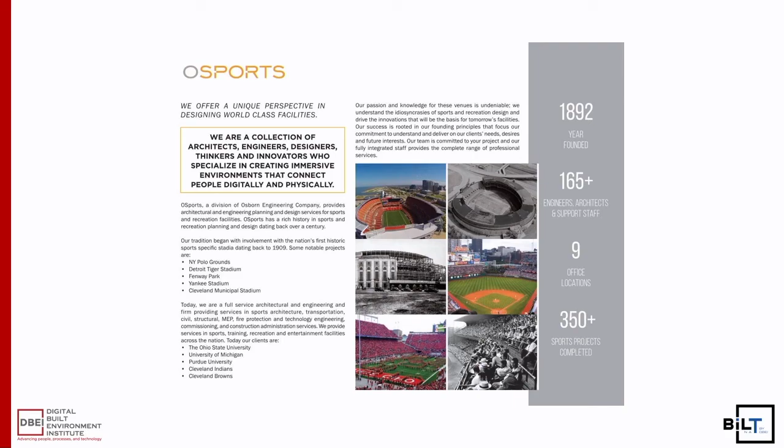So 100 plus years old, a lot of cool projects, a lot of cool opportunities, and that experience has been propelled by these 4 dynamic companies. I've had the esteemed pleasure of working for those companies for an enormous amount of time - over 18 years. They're tremendously creative people and forward thinkers. Everything you see here is due to these 4 entities, so I want to give them proper credit and respect, because it's become a really killer opportunity.

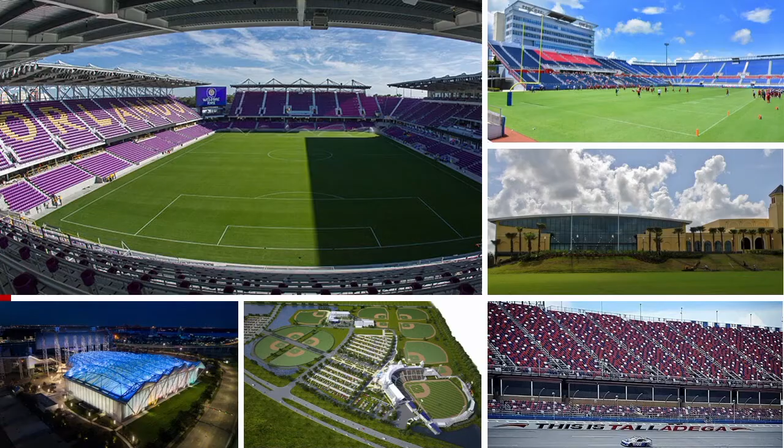An opportunity where I've done soccer stadiums for Orlando City Soccer, one of my hometown delights, the FAU football stadium in Boca Raton, the Jostens Center at Disney in the right corner. Even more utilitarian type projects like NASCAR at Talladega, spring training complexes, dormitories and resident buildings for players. The one in the bottom left is really amazing - that's the Jacksonville Jaguars amphitheater and covered flex field in Jacksonville, Florida, which we're going to highlight, because that's where this whole thing started for me.

Before I get into that, the learning objectives - even though the title says faster stadiums using Modular, that's just the tagline that sets up the story. What we're talking about is the new process-oriented delivery. We're talking about how we can leverage our construction managers, our engineers, technology and architects systematically, so it makes our life and our projects better. We're talking about a new way to project deliver projects. We're talking about modeling, how we model, and how I think there's some efficiencies and waste in modeling.

We're going to talk about why I think team is universal. I don't think team should ever again be - and I don't think in 3 years a team will be - architect, engineer, contractor, and supplier. I truly think that's ridiculous. The discover options is a particular option - I'm going to show you a case model of 1904 FC, a soccer stadium concept in San Diego for an emerging market. So we're going to highlight that.

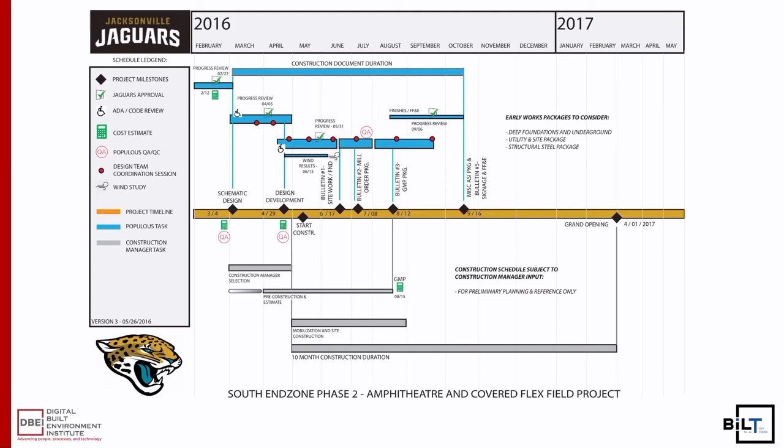So for us to get to the flow, we had to identify what software we were using, how we were going to use it, who's going to use it, and who's going to model what. In this particular case, we used Revit and Rhino, we used Grasshopper, and then obviously Tekla. So don't worry about the words, but basically Populous designed the model with Rhino as the geometry.

We used Dynamo and Grasshopper to transport that into Revit to use native geometries. Then the Grasshopper script would communicate back and forth with Walter P. Moore's model and with Banker Steel for the Tekla model. So we were able to use one model, one script to help navigate that, which was really effective, because ultimately we were able to control the steel model. We owned the steel model. It was one source, one whole.

So we used some other things like Kangaroo and everything to help with some modulation, because we had to do ponding. The fabric was on the bottom of the steel, which obviously has waterproofing issues with that. But quintessentially it's the Revit, the Grasshopper, and Rhino.

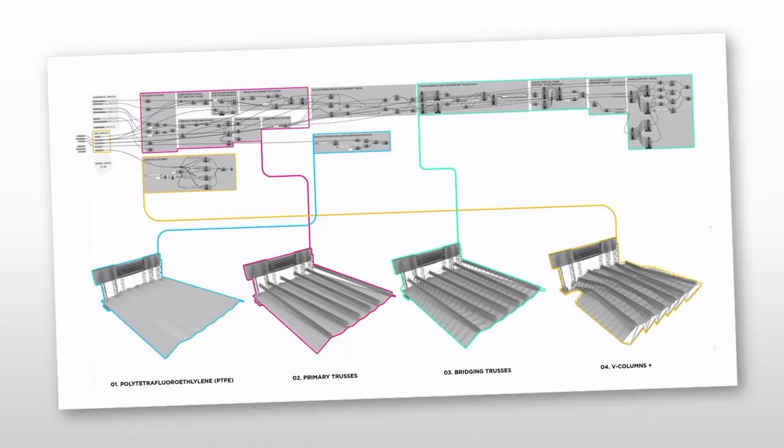So this diagram is really awesome because, although I didn't have anything to do with authoring the Grasshopper script, we all talk about BIM plans being a thing back then - everyone should have a BIM plan. But for us, we did have a BIM plan. Furthermore, what we had was a detailed delineation of how the Grasshopper script worked. It wasn't one person in the corner writing the Grasshopper script - we all knew where and how it was made, so at any given point it was understood what the process was.

We delineated what the PTFE roof is, the fabric, the primary, the bridging, and the V columns, because these are all things we were having conversations about with Banker Steel to save money and time. The V columns are these really accentuated columns on the south facade, and we wanted all this independent. So it was really important that we consolidated that effort so we all understood it, because it's another way the team is more collaborative.

It wasn't like I'm just relying on Andrew to do one thing and Tom to do the other thing - we all got it, we all bought into it, it was described. So what that allowed us to do was work from left to right. The problem was the building - that was the issue.

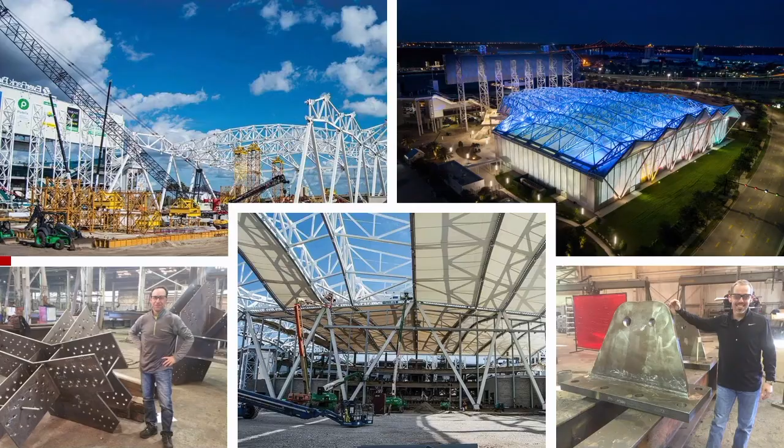So the key is, how do you clean that up, how do you avoid that potential chaos? Because that could have gone wrong real fast, that could have got bad. And it wasn't fun - I literally had an ulcer one time and had to go to the hospital. It was pretty chaotic, and it was chaotic because that was it, right?

In the bottom left corner is our esteemed structural engineer, Walter P. Moore, sitting next to one of these grids. I'm on the bottom right, looking at one of the V-column brackets. But it was us immersed in the process - it was Banker Steel, Walter P. Moore, Populous, ME Engineers, and Arup. We were all immersed in the process, taking accountability and ownership.

And I think that even though this is an enormous project and it kind of blurred the line, there's a lot to be taken from this and how we can better effectively implement projects moving forward. We're going to get into that later. But you can see the steel, it was ridiculous.

The building was 90% steel and fabric. Everything else was like concrete, essentially. But it was intense, and ultimately we had 24 columns.

Each one of these panels of fabric were all prefabricated and brought to site and dropped into place. We were able to take each panel, which was 24 feet wide from primary to primary, and we went 52 feet.

So it was a product of shipping. Fortunately, Jacksonville is on the St. Johns River, so there were conversations to be had about shipping and all that stuff.

It was really simple, right? We're talking steel and fabric, that was it. So we were able to take a step back and say, okay, how do we do this untraditionally? How can we do this faster and safer?

At one point in the main amphitheater bowl, I counted 24 booms, like cherry pickers, navigating in this thing. It's like, how do you do that without getting somebody hurt in a confined space? We decided, well, we work from the outside in.

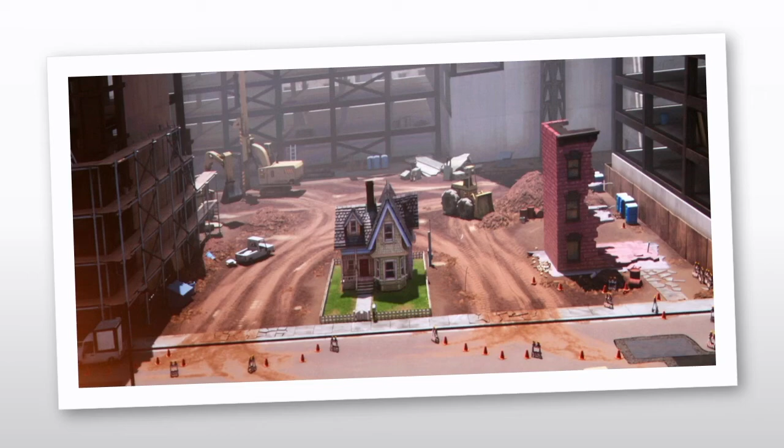So for me, I don't want to be that guy. I have a 2-year-old and a 4-year-old, and this is the scene from Up, the movie, where he's hanging on to his historical love of his house and everything he knows, and the world's changing around him. I look at that and think, holy shit, we live that.

It's the Seven Dwarf Mine Train. Has everyone been there? You have? Did you like it? Do you have kids? I do not have kids, but I am a child, and I love Disney. Yeah, I go all the time.

It's a really good roller coaster. So I got to do the whole theme park, the whole thing, right? Like all this, and there were some other companies that did Ariel's thing.

The moral of the story is we got to the point, and Seven Dwarf Mine Train was supposed to be Cinderella Chateau, where all this stuff happens, and then somebody at Disney literally raised their hand and said, well, you have Belle's Cottage, and you have Be Our Guest, and Gaston's Village, and the Little Mermaid, and Cinderella Chateau. What's my son gonna do? And we're all like, holy shit, he's right. So literally, the whole park was supposed to be done at the same time. So we found ourselves responding to the scenario, and Disney redesigned the whole thing, and they came up with Seven Dwarf Mine Train.

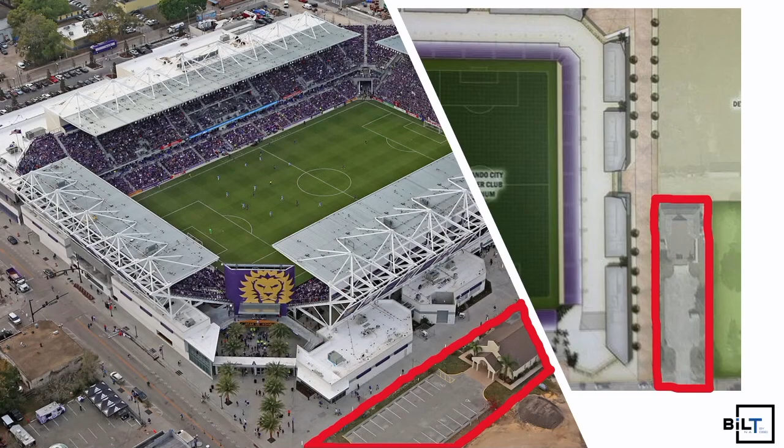It was really interesting because you go back to Mr. Fredricksen and Up, and you realize we see that all the time. Our project sites are getting tighter, the staging areas are farther away, the materials are different. So you have to be conscientious of how you're getting there.

So after Jacksonville and after Orlando City—actually Fantasyland came first, then Orlando City, then the Jacksonville Jaguars. I happen to love soccer, so I really, really like soccer. That's the project type I enjoy the most, and minor league baseball, just because they're more involved and more family friendly, I would argue. They're smaller, more boutique, more intimate.

So I know a lot of people in the soccer world, and I chase soccer projects. So around 2017, the 1904 FC, which is in San Diego—their logo, 1904, is literally 19 because S is the 19th letter in the alphabet and 4 is D. That's what they went with.

They came to me and said, well, we want a new building, but we don't know if we're going to have a good fan base. We don't want to spend $120 million and we don't want to build a 20,000 seat stadium as an emerging market trying to figure this out. Is there another option where we can build a football experience, a soccer experience, without investing a tremendous amount of money? So they asked that question, and we're thinking about it.

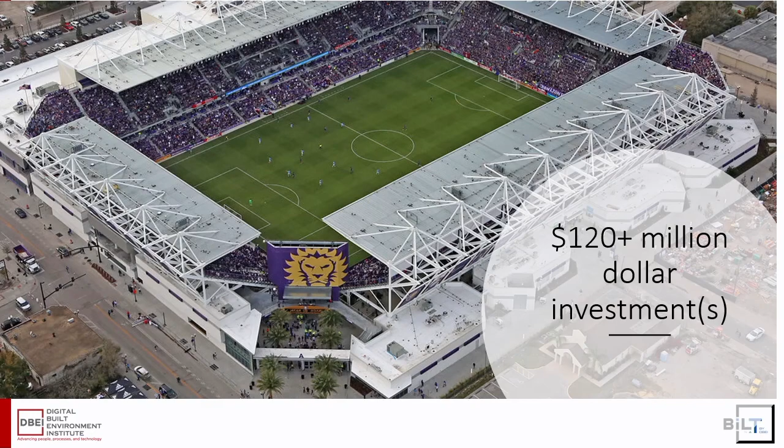So, again, it's like, how do we do a soccer stadium for $20 million or $25 million? So this was a design - we're going to get into this a little bit because that's the core at the end. But this is the design solution for a $20+ million soccer stadium in San Diego County for the 1904 FC, using offsite, prefabrication, and modular components.

Now, if anyone knows anything about any of those things, all three of those things are very different, right? Modular construction is just building something in a volume of a certain descriptive size. Prefabrication would be like building a head wall in a hospital, which is super complicated and challenging - probably, arguably, one of the hardest building types on the planet is a hospital. And then offsite construction is just physically that, right? So how do you converge all of that?

And it doesn't have to be a full mod - it doesn't have to be the cold, dense relationship of a shipping container, which is what traditionally people think of when they think of prefabricated or modular construction, which they have their purpose. We can look out the window on the other side of the building, and all the construction trailers are shipping containers modified. And there are some good examples - if you've been to a Starbucks, drove through the drive-thru, and saw two shipping containers welded together in the shape of a T, you had no idea because it had a great skin on them. So it's those kind of things that we have to take a step back and think more optimistically about how we can use sustainable objects. There are millions of shipping containers sitting on properties all over the place, just completely underutilized.

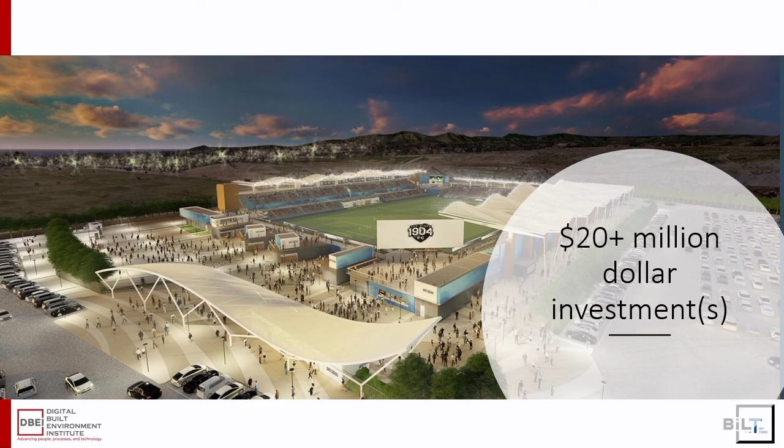So we come back to the $20 million deal, and we've all seen this thing. Viatechnik shared this graph, courtesy of McKinsey & Company, which is the firm my brother works for. The red line is the manufacturing world, and the gray line is construction. Every one of these charts shows manufacturing going up and construction staying dormant. The only way we're going to be sustainable in 20 years is if we figure out how to close that gap.

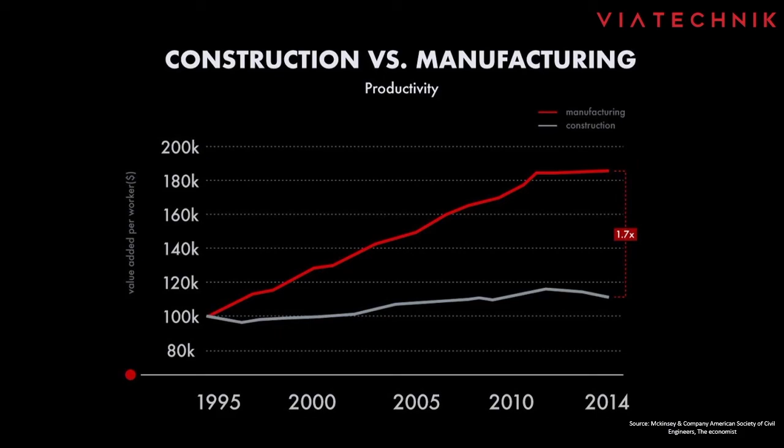Gross domestic product is going down, business sales are going down, jobs are going down in a traditional sense. But the economy and the opportunities are vast and growing. We're ignoring them because we're afraid of the risk associated with adopting them. We're afraid of performing appropriately, like the professionals we are, architects, engineers, contractors, and technologists.

So I mentioned digital practice. What is digital practice? Does anyone want to tell me what they think it is? Software used for production? I'd agree, implementing technology for... but I don't know. That's what I'm saying, what is it? Is it physically designing digital environments? Is it eliminating paper documents? What is the end goal, what is our product? Historically, we're architects building buildings and spaces, and contractors building buildings and spaces, but is that still it? Does it just change, is digital practice just the difference of not using sketch paper and bum wad and models? I don't know.

So these companies are trying to figure it out. We already talked about Disney. Does anyone know who PCL is? PCL Construction - they have a large headquarters, I think predominantly in Canada. They have a group called Agile, and Agile is a plant they sunk $2 million into, a fabrication arm within the company so they could do prefab and offsite construction.

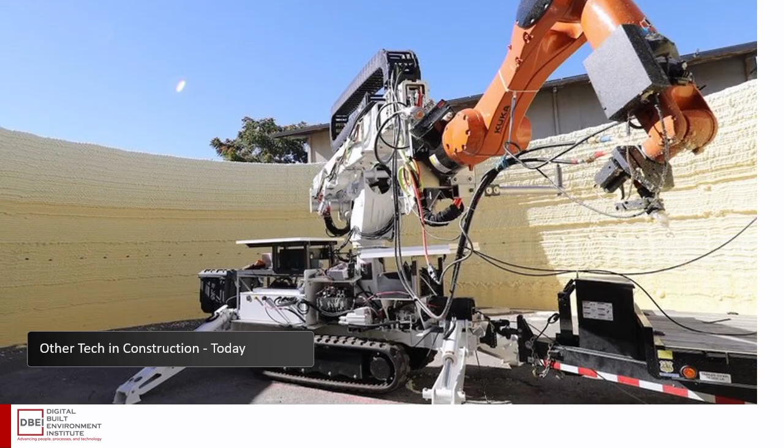So back to my brother's point about outsourcing — in 2013 he said everybody's going to be a robot, and he's right. We have robots building houses in China, we have robots from Boston doing backflips, we have robots building furniture.

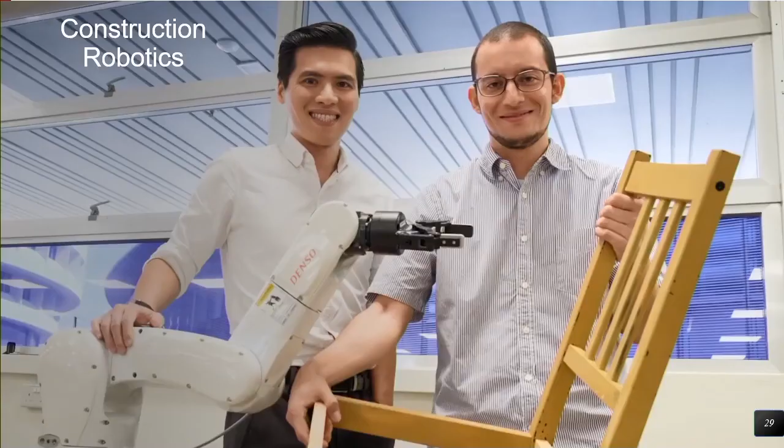Right? Super simple, but proof of concept. If we don't pay attention to these tools, we're just gonna keep going down a dark path. And 20 frustration-free minutes.

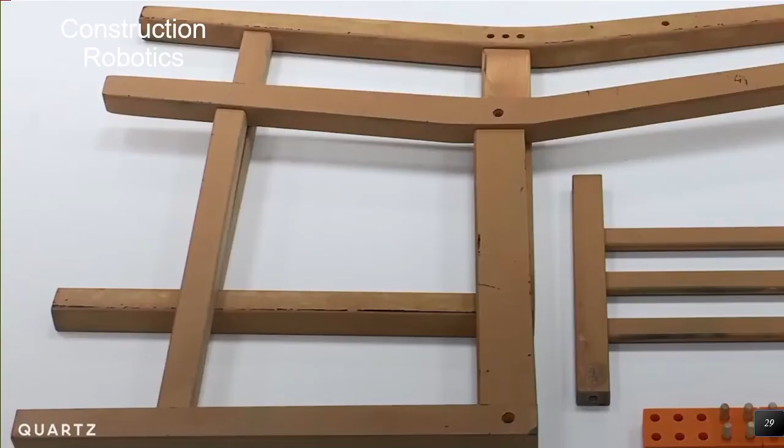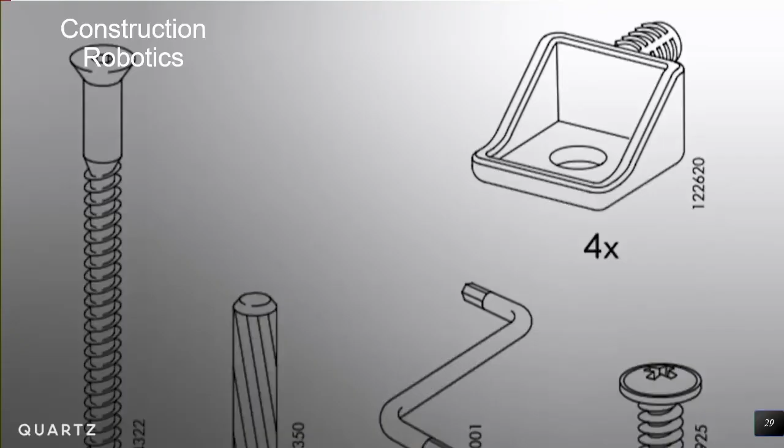There's a video I tried to find. I told my wife to send me that video when I was putting that crib together. I have a 2-year-old and a 4-year-old. It took me like 6 hours to put this crib together, and I swear I dropped every curse word putting that thing together because it was painstaking.

But with sensors - I don't know if anyone went to the technology in the future technology class a couple, yeah you were there - he was talking about sensors. There's sensors galore. They can sense anything, they can see anything. They can respond to that, and they can plan for it. So plan and control the steps, right?

And so Boston Dynamics, we talked about, they're trying to create robots that can do things that we wouldn't think they can do. I don't have a video of it, but literally these things are doing backflips. They're controlling their balance, they're reacting to a ball rolling across the floor with sensors.

I ordered something - I just moved to Tampa, as I said. I ordered it at 10 o'clock at night, and I swear it was on my doorstep by 10 o'clock the next day. I told my wife I said, I think they brought it here on a drone. How could it possibly be getting here that fast?

But project monitoring, safer, more consistent, more concise, and forward thinking, right? So what's forward thinking? Tomorrow, what's tomorrow? The 50th anniversary of us on the moon, allegedly.

I'm just saying, I'm pretty sure the flag wouldn't be waving in outer space, right? So Buzz Aldrin swears on the Bible that it happened for sure. But that's 50 years ago tomorrow, July 20th, 1969.

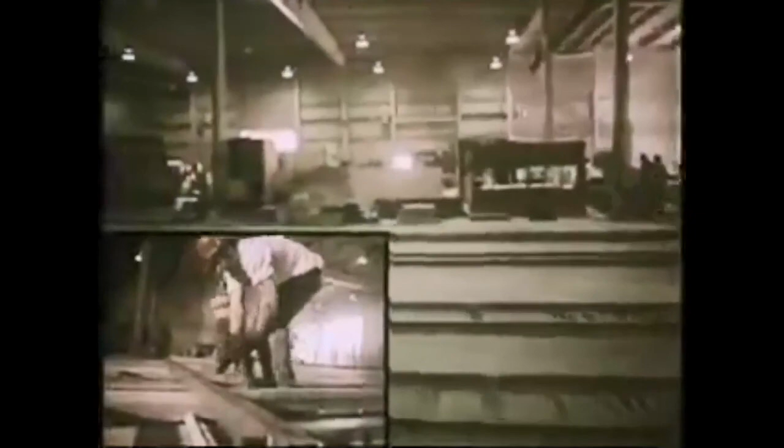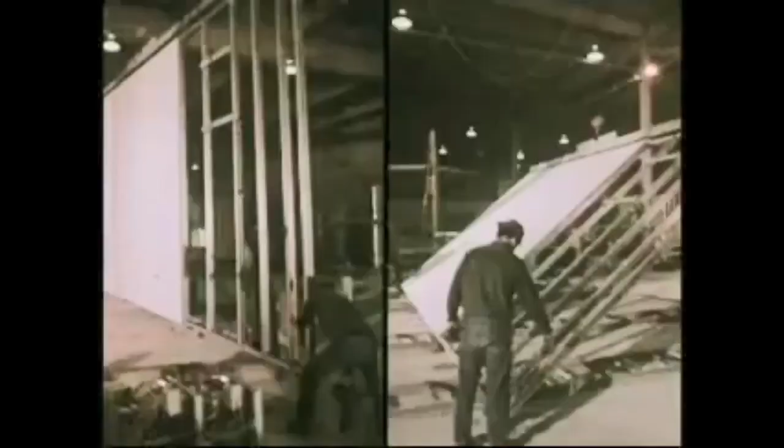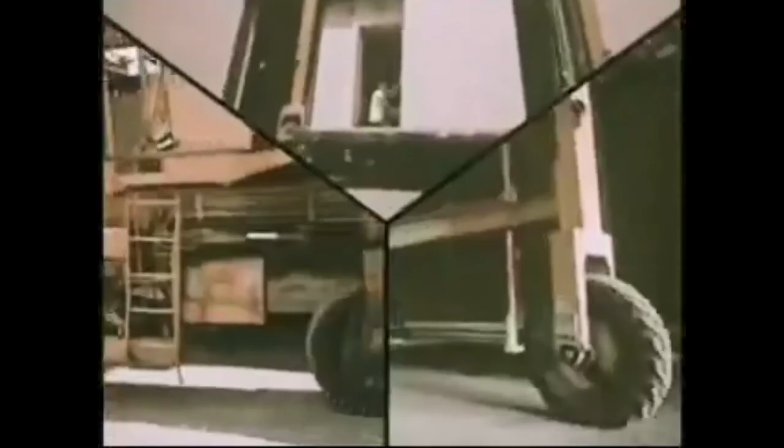When you and your family visit Walt Disney World in Florida, come stay at a spectacular hotel, one of two that United States Steel helped plan and build here. It's more than a hotel, it's a prototype of a whole new way to build. Everything about it is striking, but most unusual is the way the rooms were made. Instead of being built in place, the rooms for this hotel were assembled in a nearby factory by our American Bridge Division. First came a steel frame, then a floor of poured concrete, wall panels from our USS Homes Division. Next, the ceiling with air conditioning built right in. Then wall covering, a complete bath, even sliding doors. When the units leave the factory, they're trucked to the site and fitted into this 14-story frame like drawers into a chest. We're confident that schools, hospitals, and other structures will soon be built this revolutionary way. We not only supplied the structural steel, the cement and the foundations came from our Universal Atlas Cement division. So come stay at this unique hotel, a remarkable place inside and out.

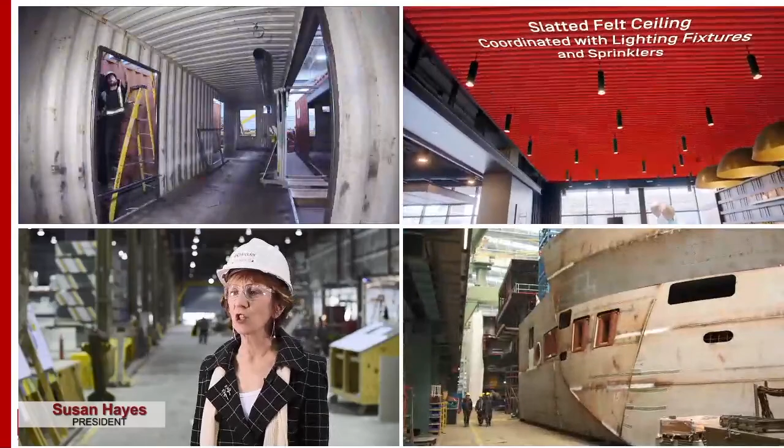That's where Disney started, finding new ways to prefab build. Like they used United States Steel, we're involved, was part of the steel world. So basically you had cruise ship design. And cruise ship design, predominantly in Europe, has prefab and offsite componentry to it, modular components, where they build everything in parts and pieces. They literally build a stateroom upside down because it's easier for the tradesmen and tradespeople to put pipe and ductwork down as opposed to leaning up. Then they use robotics to take the cruise ship rooms, flip them over, and plug them in like a drawer, just like Disney did in 1971.

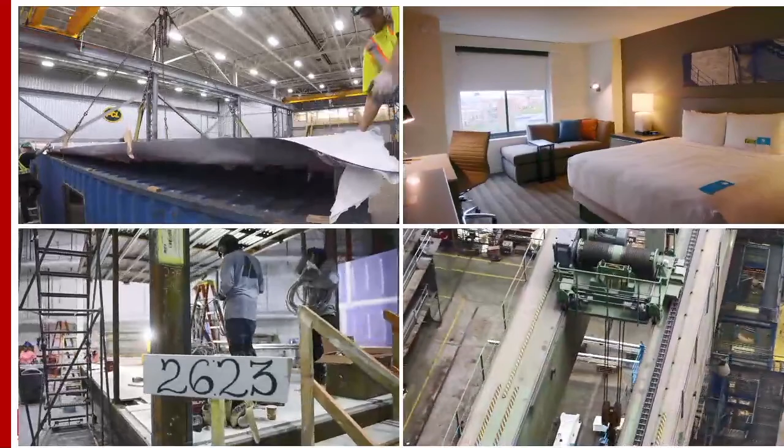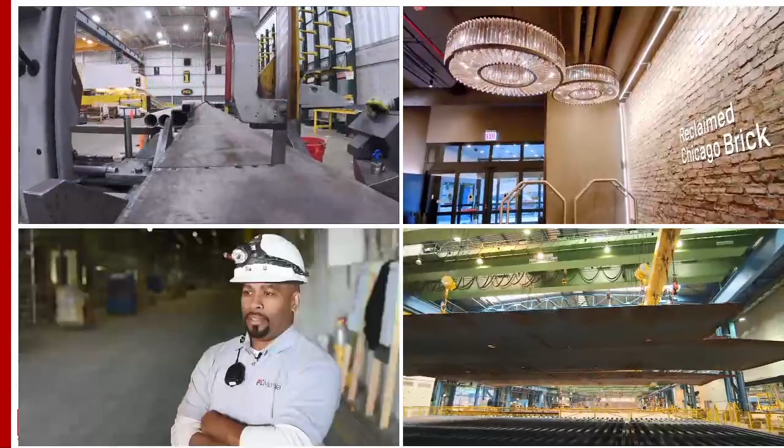And then you got PCL Construction, Terry, a good friend of mine. They have that plant in Toronto called Agile, and they're trying to figure out a way. That video happens to be talking about shipping containers because that's what's abundant and relative. And then you have companies like FC Modular down in the bottom left who are using labor and union workers, and they figured out a way to dispel the whole thing like, well, prefab doesn't work in the union market. Yes it does, because they do it every day.

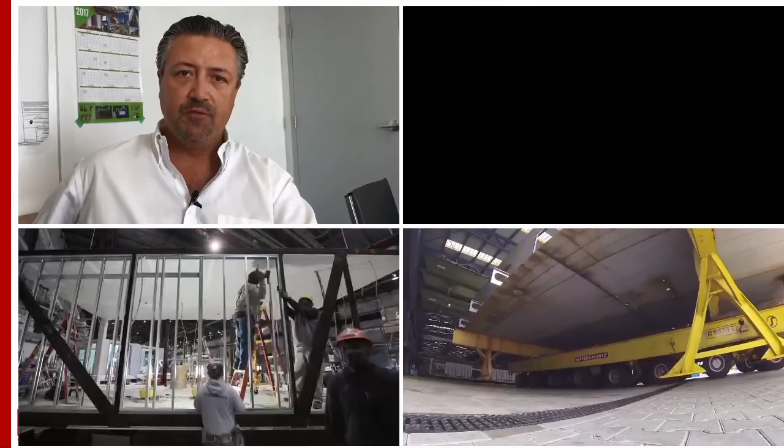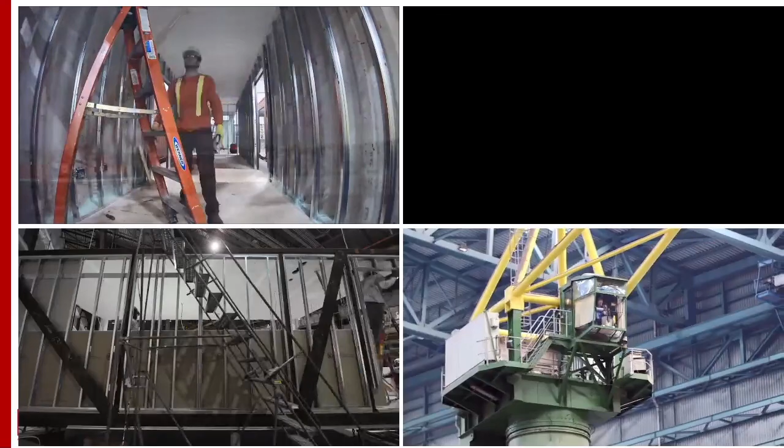And then in the top right corner, Skender built a condominium building. I don't know what happened to the video. But so you have Skender in Chicago, you have FC Modular in California and New York, and then you have the cruise ship industry. Every cruise ship is built in the same way. Has everyone been on a cruise ship? Not Carnival, because that does not count.

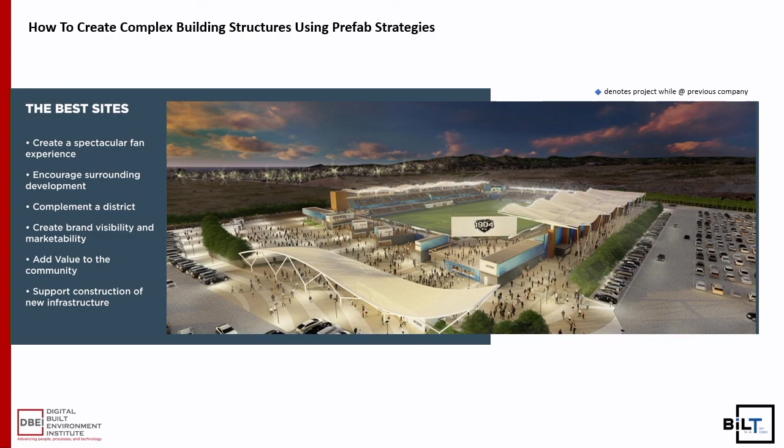Well, of course I would argue that I designed it, right? So it's 145,000 square feet of program. How do you do that? I already talked about how you think about your program, design it, draw it and develop it, and model it so that a fabricator, like FC Module or Banker Steel, can take it, harvest it, use it, and give it back to you or build directly from it. So for us, it was a matter of taking the traditional elements that we like in sports architecture.

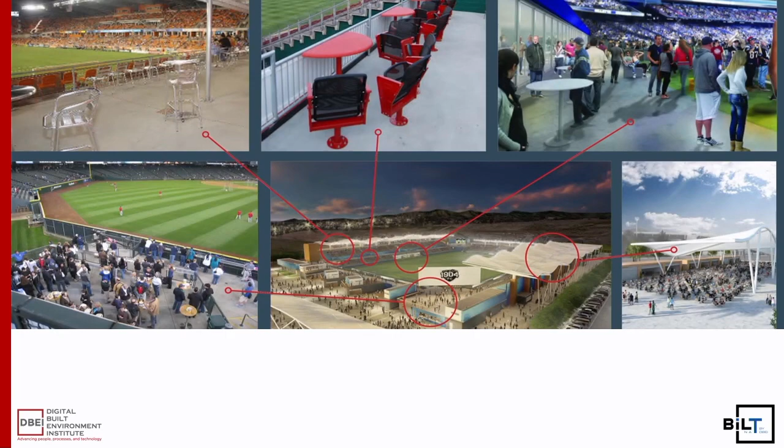You have experience, you have clubs, areas where you can get a drink and still watch soccer. You have group terraces, you have shade. All these things are 100% transferable, so we lay them out. Our builder at this time was GL Events, which was a portable company, they do pods, prefabrication, and modular construction.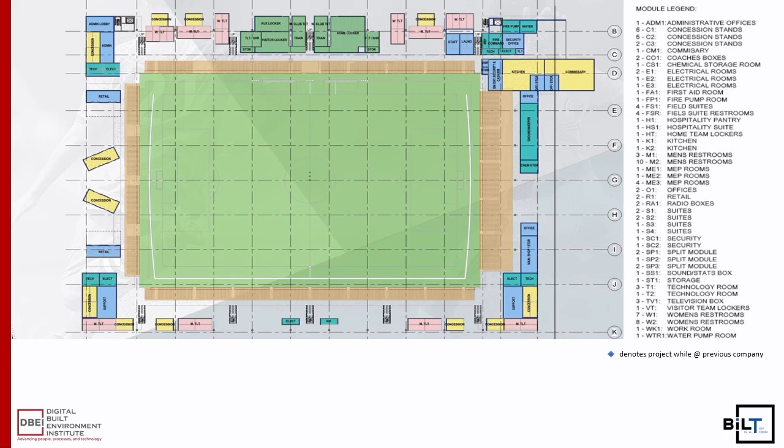That's 145,000 square feet of space, and then I cut it up. But I was mindful — I didn't just draw it and design it with all the stuff. I thought about it: if they gave me, in this case illustrated as an 8 by 20 module — 8 feet wide, 20 feet long, 15 feet tall — that's the module we picked because it was the most cost effective.

So how can I build a locker room using these modules? In the bottom right corner is basically a culmination of 16 8-by-20 modules, methodically thought about and choreographed so they could build their space. Cut in half, and I have everything — 32 lockers, hydrotherapy tubs, coaches' offices, everything I want in parts and pieces.

So to be clear, the whole locker room is one contiguous space built in 4 pieces. At the end of the day, you just need 4 posts, a floor, and a roof — you don't even need the roof per se, just the frame around it. And you have a lot of luxuries and flexibilities; they don't have to be 8 by 20, and they don't have to be 15 feet tall. It's just whatever your fabricator or supplier is giving you.

In fairness, how big is a semi-truck? 53 feet, right? And how many times have you seen a big old bridge going down the road that's not 53 feet, more like 72 feet, and they drive it down at midnight? There's permitting. So you're not limited to an 8 by 20 by 15 — people are just limited because they're not thinking about it.

I told you about the St. Johns River in Jacksonville — we could have floated that whole 165-foot truss, fully assembled, down the St. Johns River. We could have done it. Our problem was that between the St. Johns River and the site was an elevated freeway, so we couldn't get under it. We had to think about that.

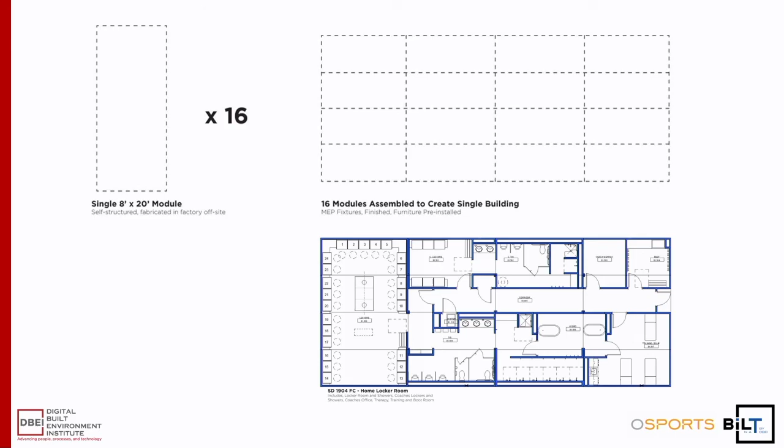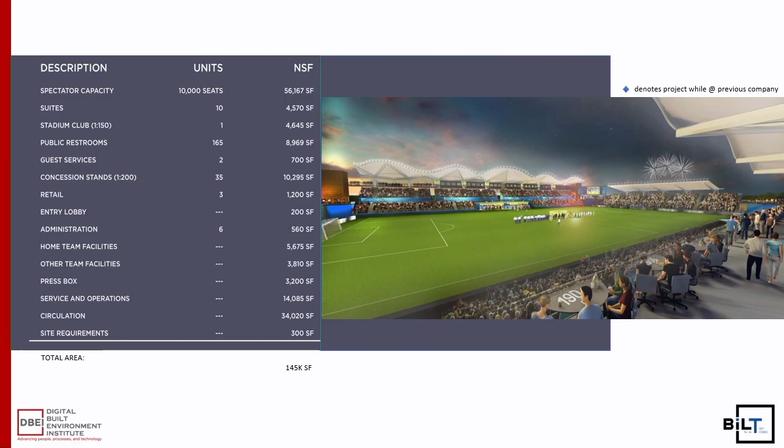So how do you do a roof? Well, you think about it differently — in pods, in series, thinking about repetition. We had 4 different roof panels. That whole roof picture is made of 4 panels, repeated.

We worked with Structure Flex, a fabricator and contractor — so they're both a supplier and contractor. They signed up to do the engineer of record. That's design assist, everyone's heard that term, right? Because that's delegated design. It's not giving up roles and responsibility, it's giving up the mundane tasks in between. You don't need to do that — I don't think you do. I don't.

So we have 4 panels repeated. They build them with the shape, length, width, and size all planned so that Structure Flex could build them in their factory in Kansas City, take them to San Diego, and erect and install them.

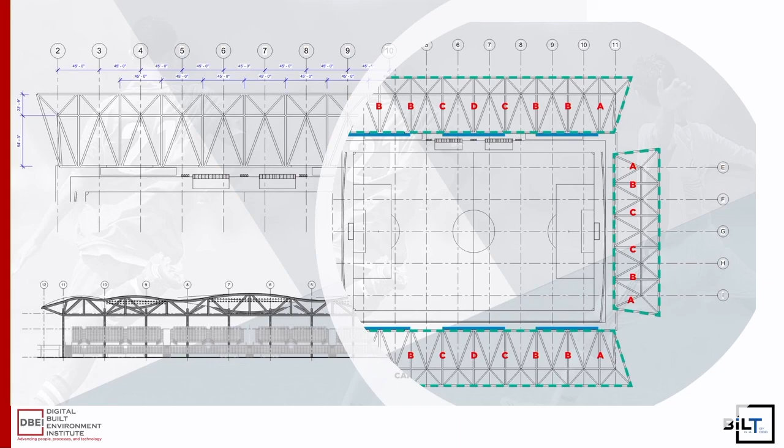So then you get these pieces, right? You get the fabric, the canopies, the experiences, the branding, you get it all. In sports and entertainment, if you go to an event, I don't care what it is. It could be a concert, a recital, a karate thing. It doesn't matter. Whatever you go to, if it sucks the first time, will you go back? You won't. And for these teams trying to emerge into a market and create a brand, they deserve something meaningful and responsible.

Okay, so back to the design motif thing. I can't tell you how many times I heard my people say, well, we're not Marriott, that's not high design. Have you ever been in a suite? They're pretty typical. They're 12 by 24, and they have a bar, a counter, and a Mitsubishi unit in the roof, and glass, and you look out onto the pitch.

So this is a suite in Orlando City. And then I mentioned Party Shack. So these are their little mods, and that's inside one of the Party Shacks. You know, you can have it, you just think about it differently, right? And you engage your sub-consultants, fabricators and manufacturers differently. And you don't have to go all out. You don't have to do it all.

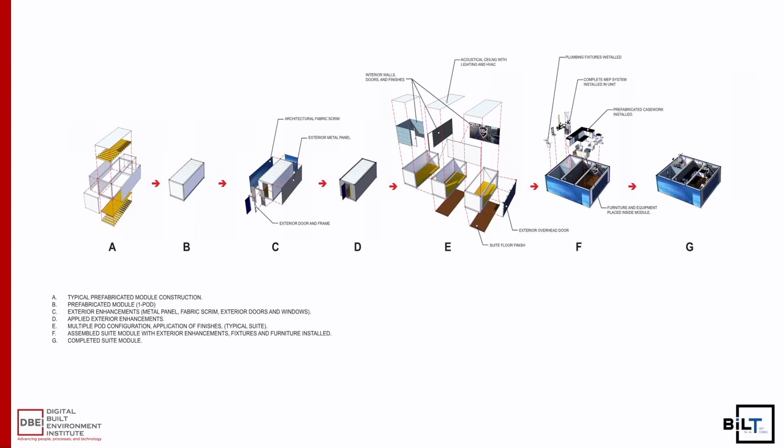So again, here's some adaptable module. And the building in the middle is a European soccer training academy. So it's got a locker room, it's adjacent to a field, it is what it is. And I've done quite a few soccer training facilities and football training facilities, and they're not extensive. They're very utilitarian, and they are there to serve a function of training.

So in this case, Modulek built a whole soccer compound using prefabricated off-site construction. And it's not a shipping container, it is literally welded steel cages with proper concrete floors, ceramic tile, gypboard, ceiling tiles, and all of that stuff, right? And then, of course, you have the location thing, which leads into faster, quicker, more efficient and safer.

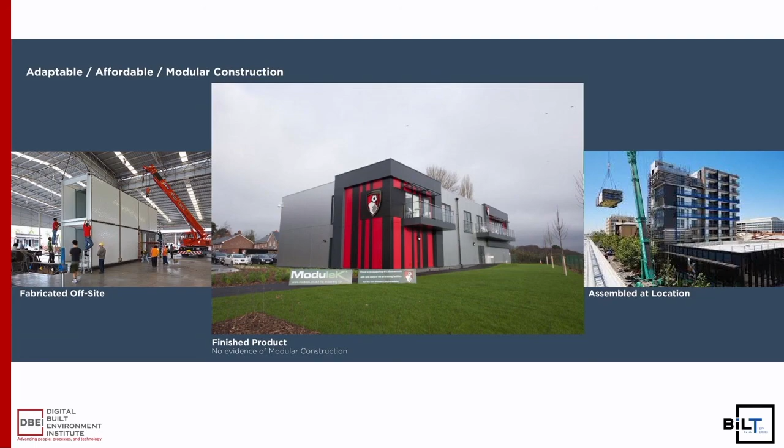So, faster. It's almost like I wrote this. So here's a schedule, and this is just for fun facts, because this is something I had to try to rationalize, because I had to test it myself. I had to ask myself actual questions. So in a traditional sense, if I was to design a small 10,000-seat soccer stadium, and if I was to invite my partners at ME and Walter P. Moore...

It would take us 2 years to build it, to draw it and build it. That's about what it would take, being responsible and efficient and very methodical about it. In a traditional bricks and sticks approach, you have a civil guy, you do the geotech stuff, and so on. In a modular situation, you can do it in a year. People are building these things, and Marriott's doing a 26-story building in 90 days.

And it's because the overlap, your works overlap. While you're clearing the site, right? While the civil person's doing the site, you're fabricating units, you're fabricating roof panels, you're fabricating wall panels. You're doing all of that at the same time. And then when the site gets done, you drop everything in place and put it together. So in theory, that's kind of why it's faster, because you don't have to wait for one tradesperson to get off the site before the next person comes in.

I've been on a lot of projects where my plumber can't get in because the concrete guy's not done. And my electrician, the guy or gal who is always the last person, can't do anything because all the other stuff's not done. Whereas all of this stuff is done systematically in a factory or some off-site location, done in order and in series.

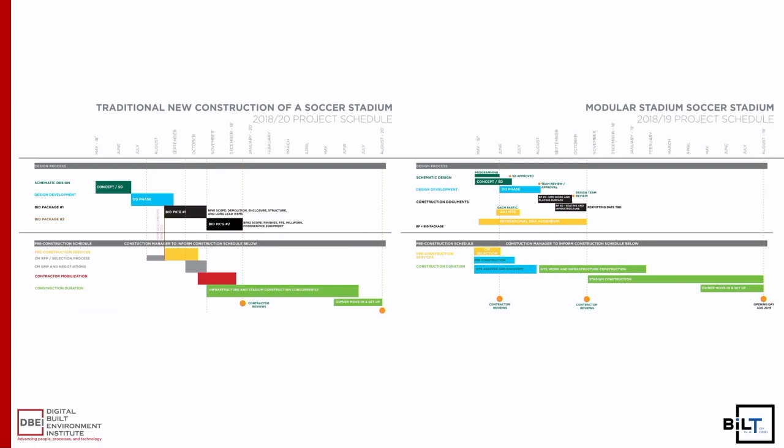It's like, okay, who does what? What does ME do, or what does Walter P. Moore do? What does Populous do? What does O Sports do? What does Hunt Brady do? What does who do, right?

And it really becomes that you have the architect, the contractor, and the fabricator all doing the same stuff, like in series. So the fabricator is my consultant, right? The fabricator is part of the team. And you can have a contractual conversation about who pays them and when they pay them, but that's for a different thing.

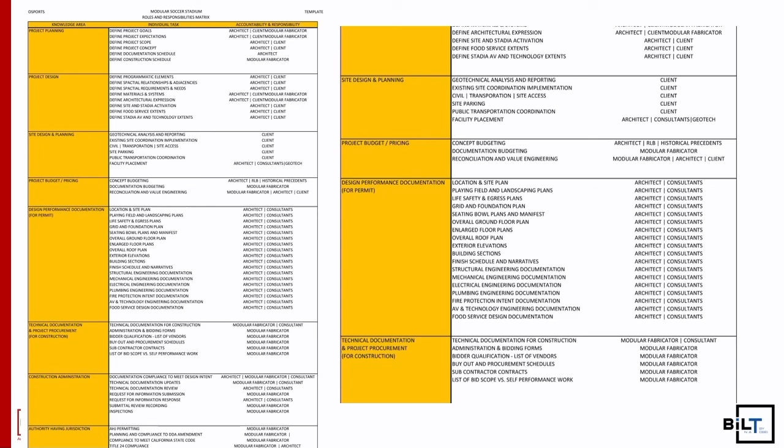Now, when I say fabricator, that's a blanket statement, it could be any sub-trade component, right? It could be anyone who's doing anything as part of the project that could be done in series. It could be the mechanical guys, it could be the foundation guys, because foundations still have to be treated the same way. Although I saw a cool video of a robot printing foundations, so there's that.

So you remember the London Underground map? Here's taking a different approach, if we streamline our efforts in our conversations, you have the owner, the A/E, and jurisdiction. Orange line is direct relationships. And then all the lines are communication strands from each of the entities.

It's the same concept as what we did, but thinking about it and packaging it differently so that it becomes more linear. Now, I'm not a linear thinker, but in the sense of progression and innovation, you have to be linear about what the objective is. And in this case, it's streamlining our conversations.

And what it does is it negates design-bid-build, construction manager at risk, integrated project delivery, and design-build. I don't give a shit about any of those things because all I care about is good architecture and a good project, right? And if we find a way to stop using those terms because they're contractual lawyer stuff, I get it, that's going to take years.

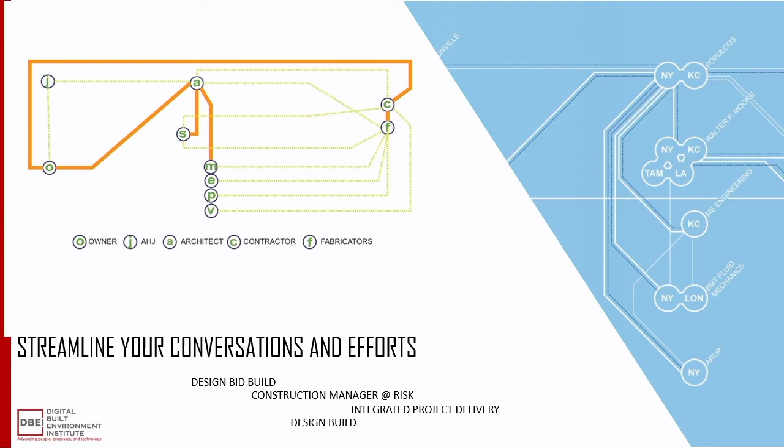But Jacksonville's a perfect example, two amazing companies, well, five, because you had Populous, you had Walter P. Moore, you had Banker Steel, you had Hunt Construction, and the Jaguars. We all bought into it. So if they all bought into it and we all made money, mostly, then why couldn't it work for our smaller projects and our smaller endeavors?

So again, have fun. And if anything we do, you have to continue to be creative and forward-thinking and open-minded. And it starts with buying your kid a prefabricated model Lego kit. It's mainstream.